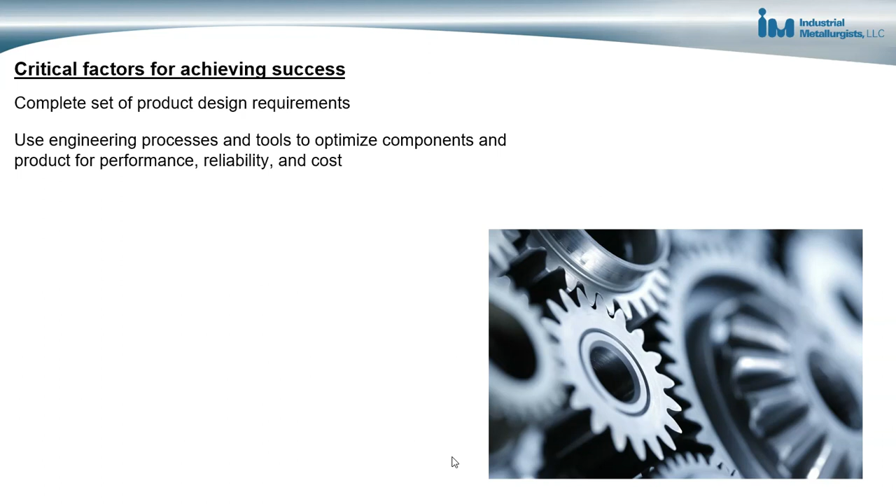So there are a number of critical factors for achieving the engineering success. The first is there has to be a complete set of product design requirements at the beginning of when the product development begins. Second is using engineering processes and tools to help optimize components and the product to meet the performance and reliability requirements at the lowest possible cost, developing capable manufacturing processes, and selecting capable suppliers. I'm going to discuss all four of these critical factors.

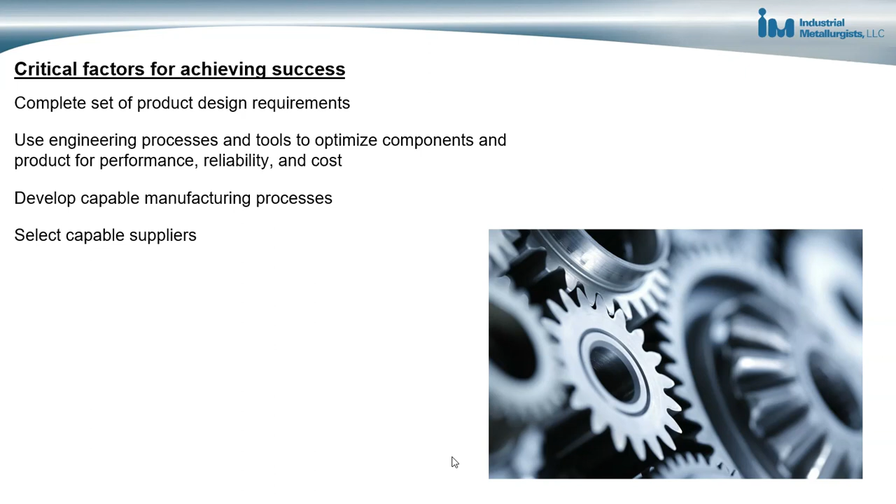So the first is starting with a complete set of product design requirements. So this requires sitting down and reviewing the product and understanding the product and developing this set of requirements. It includes the product functionality, that is what functions and features it has, understanding the performance requirements, speed, power, appearance, and other ways that the functions and features are supposed to perform.

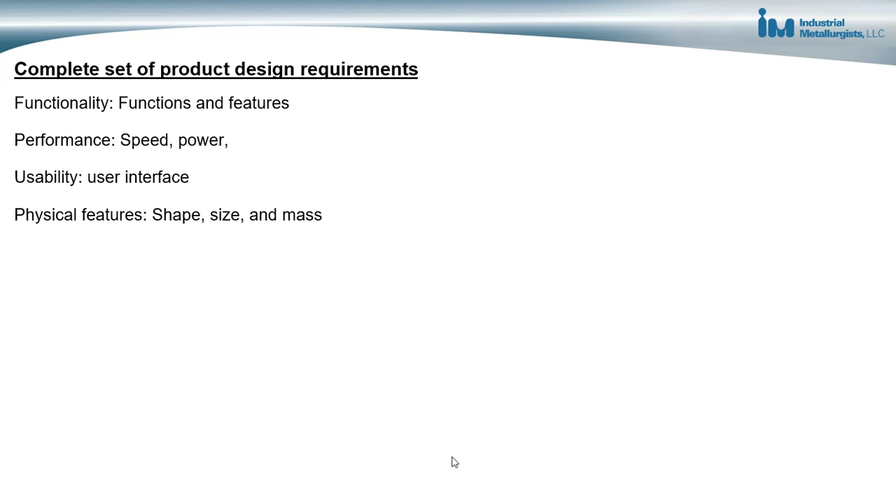Usability: if this is an electronic product, how will the user interface with it? We want to make sure that the product is easy to use. Physical features: what will be the shape, the size, and the mass of the product. Visual appearance: for many products, colors, contours, and other things that affect the aesthetics of the product are important.

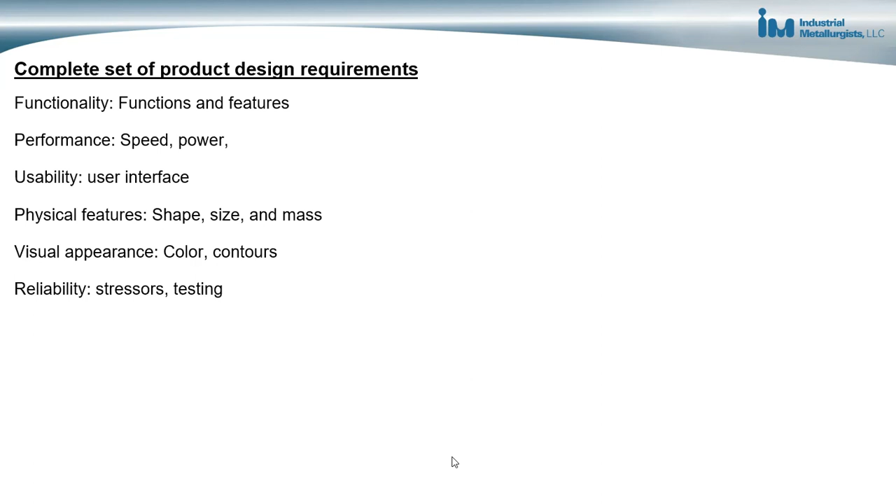Reliability: this refers to the stressors, that is the conditions that can cause the materials in the product to degrade, and the testing that will be performed on the product to make sure that any degradation that does occur will not affect the performance of the product. That is, that the product will have the desired reliability over the life of the product.

Safety requirements. Maybe we want to make the product out of non-toxic materials, have it be free of sharp edges, or be able to withstand a certain amount of force. These will all influence decisions made during design. Sustainability: energy consumption of the product, or use of recycled materials, or recyclability of the materials in the product. Again, these will all influence the design.

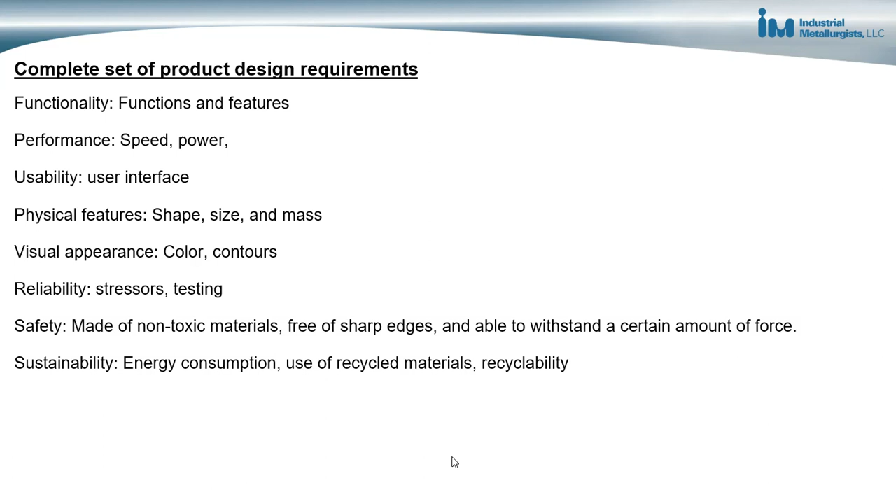So having all this information up front is very important because all these different requirements will influence design decisions, designing the components that are used in the product, how those components are fabricated, and the specifications for the components, and the fabrication, and also the joining of the components.

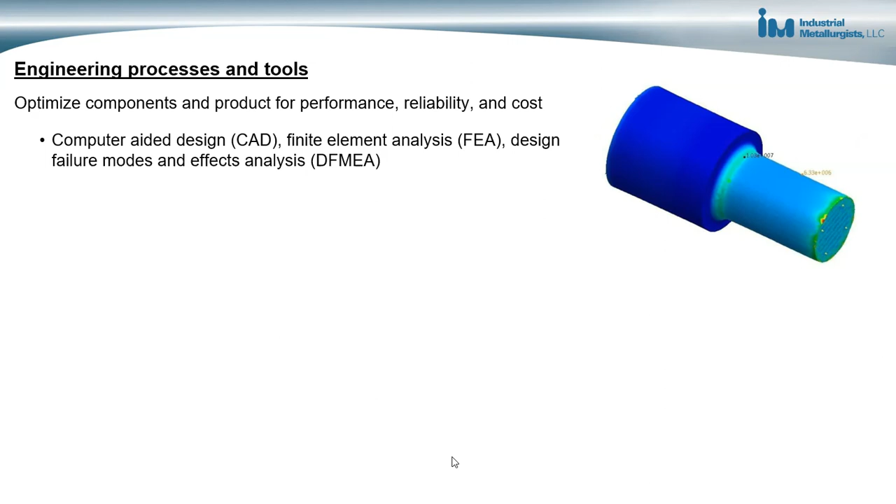The next thing is using engineering processes and tools that enable optimization of the components that are used in the product, as well as the product, in order to meet the performance and reliability requirements at the lowest possible cost. So this includes using things like computer-aided design, finite element analysis, and design failure modes and effects analysis to aid with engineering decisions. Second is cross-functional collaboration.

So typically design engineers are mechanical and electrical engineers, and also software engineers for an electrical product, but also help from materials engineers for help with material selections for components and for ways to fabricate components.

Input from manufacturing engineers about how components should be designed for ease of fabrication and ease of joining, and also input from reliability engineers to get their input about how the product and components will be tested, and getting their input when tests are performed to understand the effects of the testing on the product and use that information to make changes to the design.

And that's also testing and design feedback. Testing the product both from a functionality perspective and from a reliability perspective, and then using that information to make changes to the design. And finally, design for manufacturing. Making considerations when designing components and designing subassemblies and designing the entire product to make sure that all of these are easy to manufacture so that there's no problems, quality problems, or delays in meeting schedules.

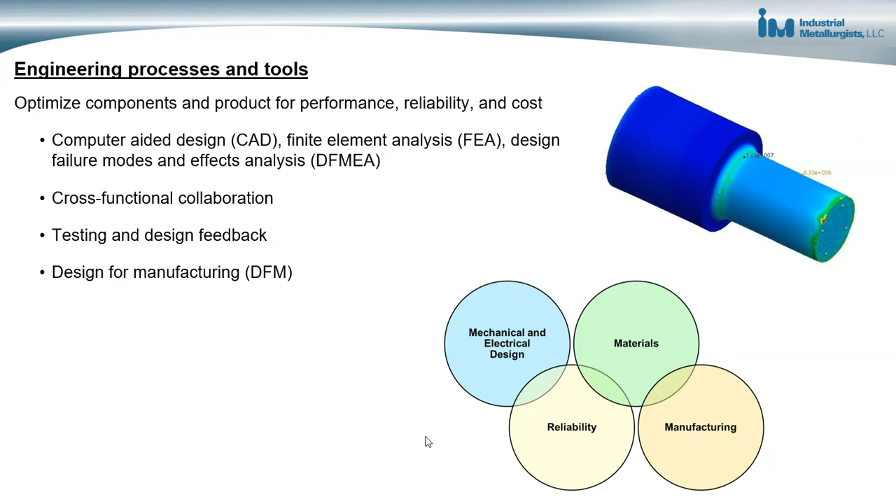The next thing that's important is developing capable manufacturing processes. And this again involves design for manufacturing. So designers should be talking with materials engineers and manufacturing engineers to understand their requirements and make sure that they're designing components and subassemblies that are easy to manufacture so that they're lower cost to produce, will have good quality, and there won't be problems meeting schedules or demand.

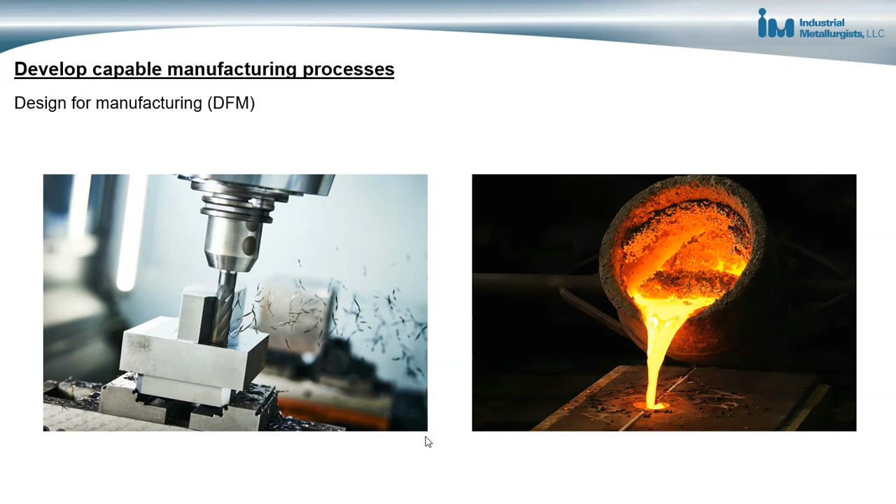And finally, we want to make sure we select capable suppliers. First thing that's important for selecting capable suppliers is writing thorough materials, components, and subassembly specifications. It's important that the suppliers understand what they'll be making and the requirements so that they can understand how to quote the thing that they'll be making, and to make sure that there's no surprises to them. Also, again, design for manufacturing, make sure that whatever people are going to be supplying to you will be easy to produce.

If it's a hassle for a supplier to make something, let's say a component has not been designed for ease of fabrication, then they will increase the cost of fabricating that component to you. And if it's too much of a hassle, then capable suppliers won't even bother quoting it. And that's part of selecting capable suppliers: if you see that your preferred suppliers are not quoting components or subassemblies, then it could be because they realize it's going to be a hassle to produce those things and they don't want to deal with it, and you may be left with having to work with less than capable suppliers.

And finally, cross-functional collaboration. Get input from your suppliers to make sure that the things you're designing and the materials you're selecting are reasonable and that are easy for them to get to you. If it's not, you could have problems getting the material or making sure that you get the materials in according to your schedules.

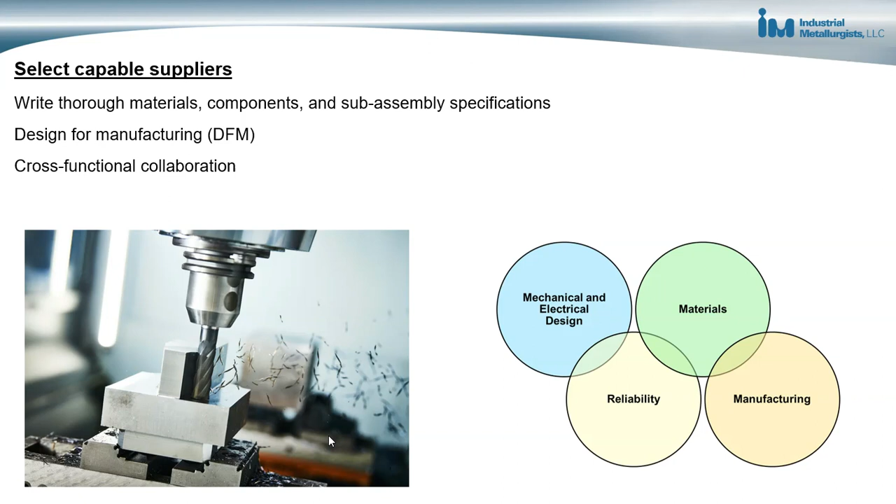So in summary, engineering a successful product means meeting performance and reliability requirements. It's low cost to produce. It's innovative and better than competitors' products. You're able to meet the development schedule and launch the product on time, and you're able to meet demand.

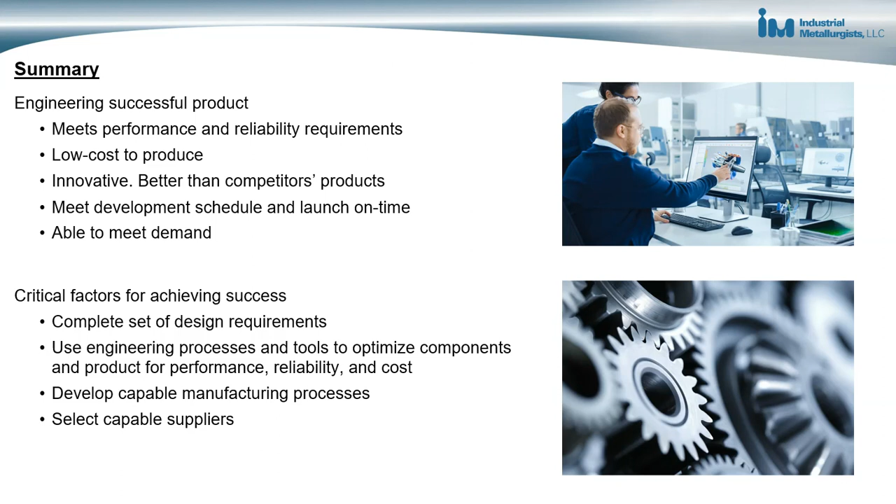And the critical factors for achieving these things are having a complete set of design requirements at the beginning of product development, using engineering processes and tools to optimize components in the product to meet performance and reliability requirements at the lowest possible cost, developing capable manufacturing processes, and selecting capable suppliers that are capable of consistently providing product that meets your requirements. So there are a number of things that have to happen. So that's what I have to say about developing successful products from an engineering perspective.